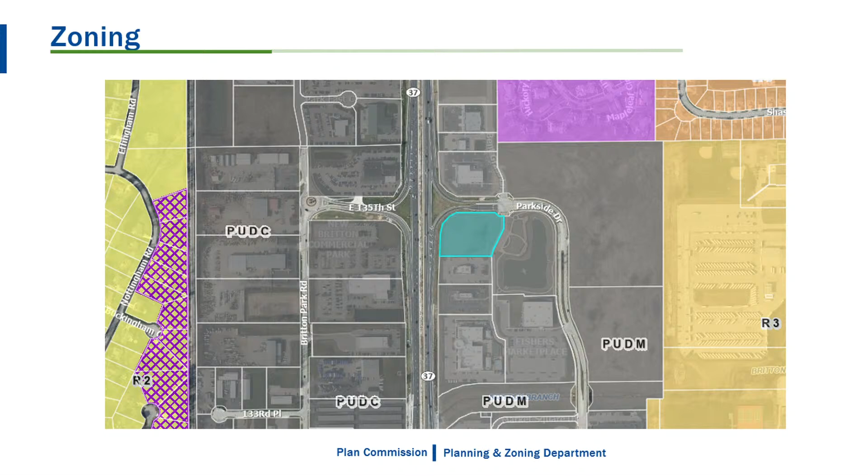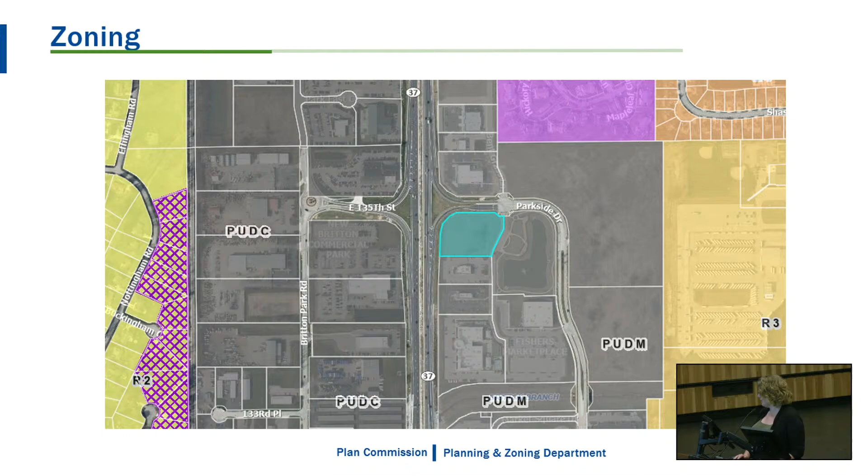The property is currently zoned PUD-M, Fishers Marketplace PUD, specifically ordinance number 070506 and amendment ordinance number 081511A. The properties surrounding this lot are zoned PUD-M to the north, south, and east, and PUD-C to the west, which is across State Road 37.

Two architectural standards were removed, one being the entryway requirements for a retail building over 10,000 square feet. This was removed because this building is less than 10,000 square feet. And the second was to remove the roof requirements requiring a combination of either parapets, cornices, eaves, or pitched roofs. Lastly, one architectural standard was added to allow the project to be constructed in a manner consistent with the renderings in the text amendment.

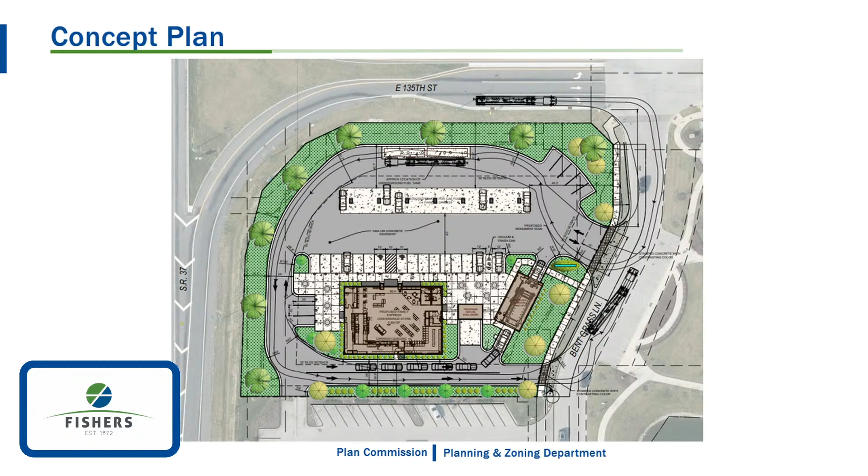The petitioner is proposing to build a gas station with 7 pumps, which is 14 filling stations, a 5,800 square foot convenience store, and a 1,300 square foot automated car wash. The concept plan also shows a plaza or patio area on the west and east side of the convenience store, and there are sidewalk connections being made from Bentgrass Lane to the store, as well as connections along Bentgrass Lane. Staff worked with the petitioner on auto circulation within the site.

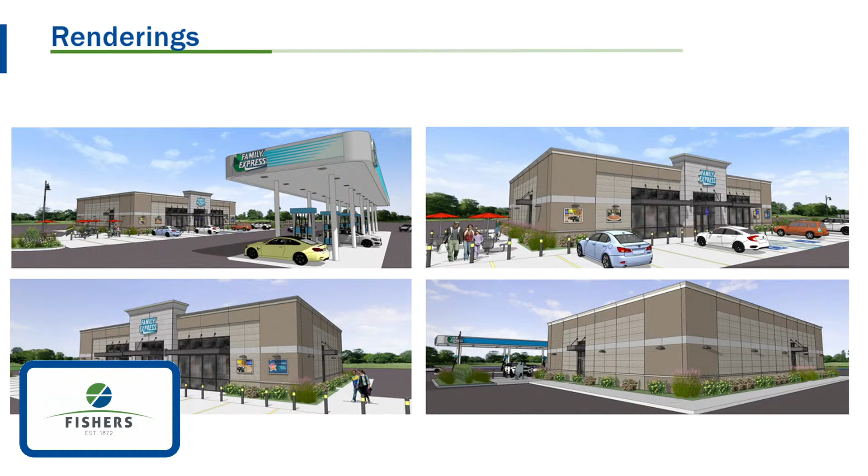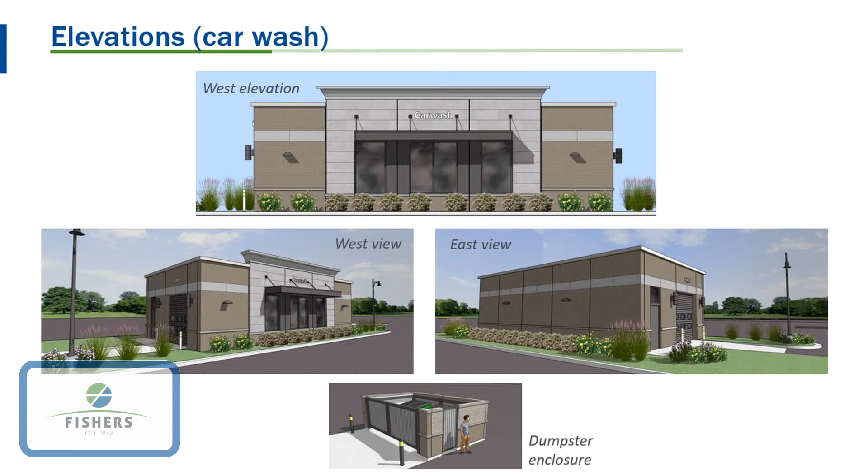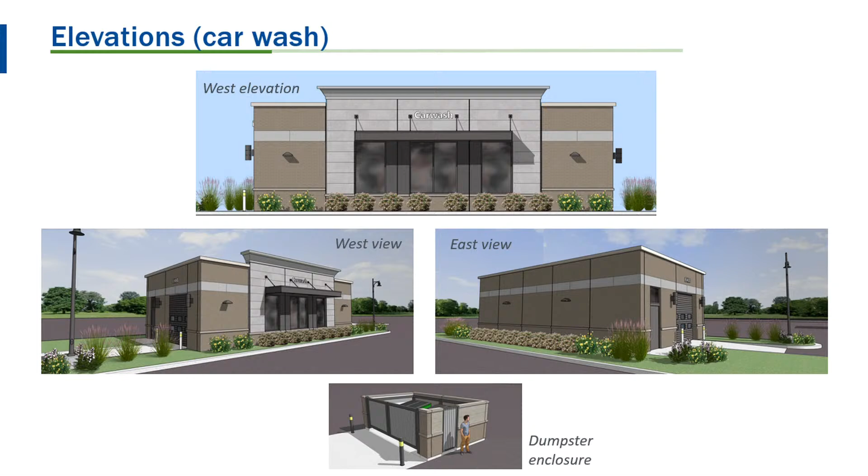The comprehensive plan calls for this area to be an employment node. This area includes the following uses: professional and business offices, maker spaces, medical offices, employment supporting commercial and ancillary uses.

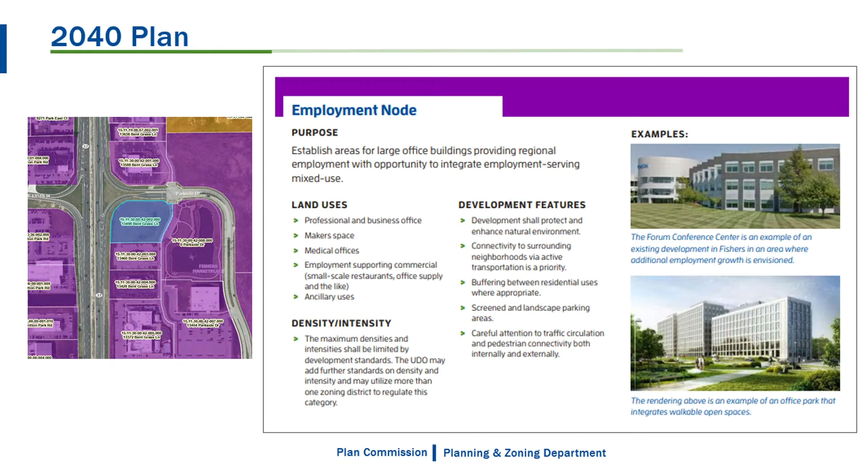When making your decision this evening, Plan Commission shall take reasonable regard to the comprehensive plan, the current conditions and character of structure and uses in each zoning district, the most desirable use for which the land in each zoning district is adapted, the conservation of property values throughout the jurisdiction, and responsible development and growth.

Staff has no recommendation for the Plan Commission this evening, and this item is anticipated to go to City Council on July 15th for final reading.

Thanks, Christy. Any questions for the staff at this point? So has council seen this already? It did have a first reading of it, back in June, May or June.

And can you share at all, any discussion they had then? I was not at that meeting, but Ross could share. I'm sorry, Ms. Logan, what was the question? Any discussion at the city council meeting?

No, there really wasn't. There was some discussion afterwards with staff on abilities of what we can do to make this better, and I think some of that is reflected in what Christy talked about, including architecture.

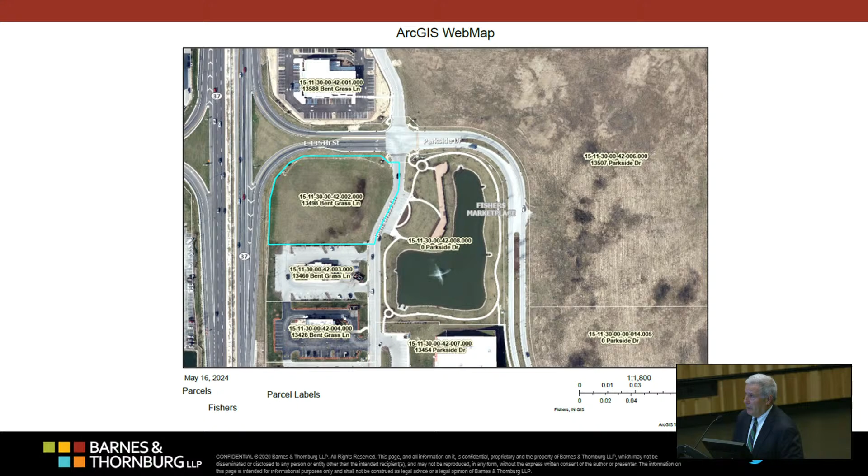The C-store will be about 5,800 square feet, which is larger than a number of C-stores that you might find. This is in order to provide the selection that Family Express offers. There are 3,500 items, hot food, indoor, outdoor seating areas. We like the fact that the site is large enough to provide some outdoor seating options.

As Christy mentioned, there are 7 gas pumps, dual-sided, with 14 positions. We've added the perimeter and base landscaping and site lighting to meet PUD standards.

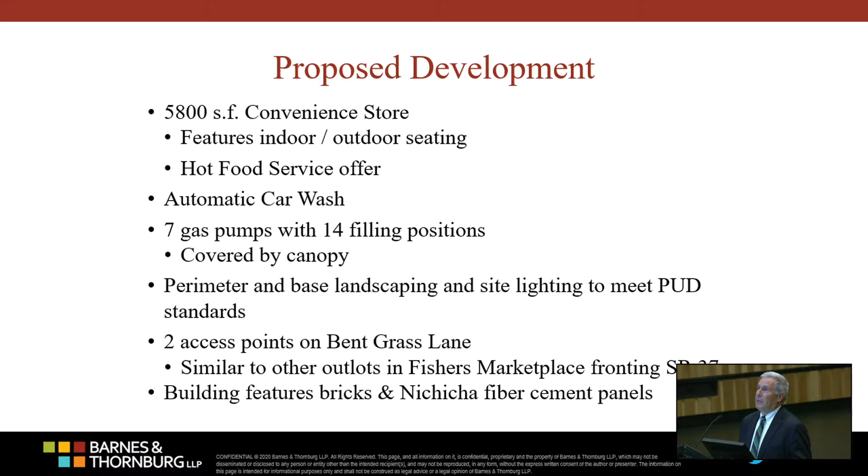When we originally presented this to council in early June, there was a pet wash. The architecture was more of the traditional trade dress for Family Express. We've eliminated the pet wash, updated the site plan, and revised the architecture by changing the color scheme to kind of match what's within Fishers Marketplace.

As you can kind of see in your mind's eye, both Zaxby's, Taco Bell, and even the B shops to the north, they're all more neutral colors. And we've totally revamped the store to reflect that.

We've also agreed to do our site lighting to match the standards. There, at one time, were some site lighting sketches. I don't know that everybody's followed, but we will work with Christie to meet all of the site lighting that's consistent. We have to do that to satisfy the Owners Association anyway.

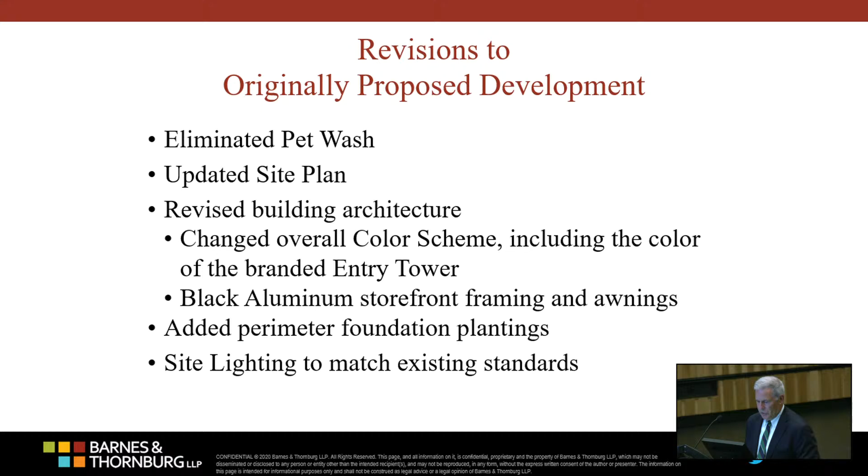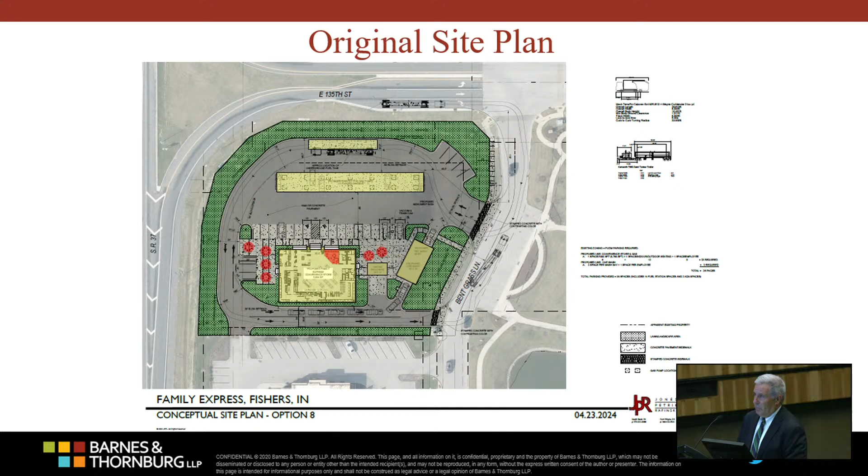This was the original site plan. You can kind of see the pet wash that was between the car wash and the building. That's since been eliminated. You can see some of the additional landscaping that's been added, the pet wash eliminated. We've got the dumpster kind of sandwiched between the car wash and the building, so it's not sticking out in any sort of front yard type of view. It's hidden as much as possible, and you can see the car wash pushed to the east to where it's really not going to be a feature from 37.

You can also probably see on this site plan the canopy is sized appropriately here. If you look at the renderings, and we admit it, and I apologize for not talking into this before, the canopy looks huge in some of the renderings. That's not the appropriate angle. The actual size is much smaller in proportion to the building.

We understand that there are users, older type of C-stores that have much smaller buildings and much larger gas canopies. So the store is about 3 times as deep as the canopy is. So don't pay attention to that. That's just kind of an exaggerated angled view.

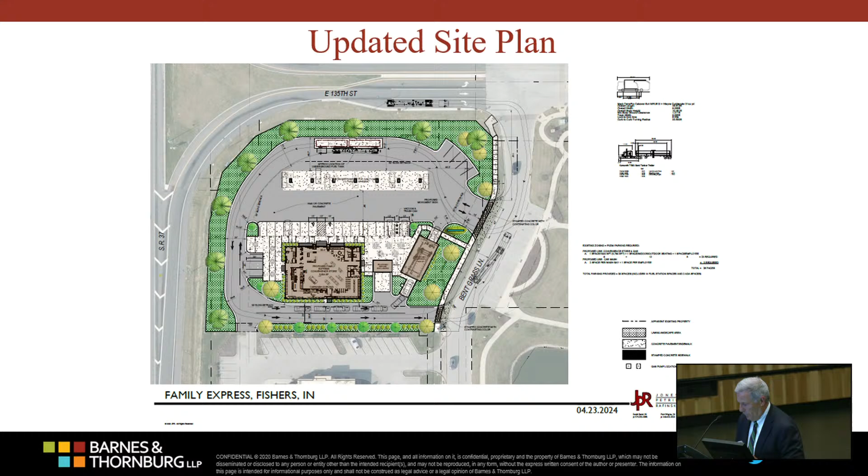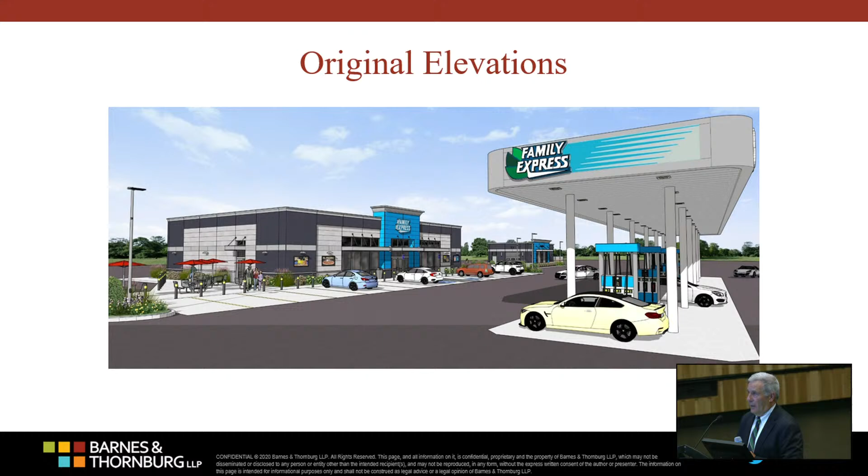The original elevations were kind of a gray, light gray, and the Family Express teal trade dress. You can kind of see that in the images that I'm sharing with you.

And it thematically went between the C-store and the car wash. In the updated images, you can see the color scheme has been softened. We've kept the Family Express trade dress color for the signage, but it's much more nuanced, and you can kind of see the black framing along with the architectural features coming off of the building at storefront and on the sides with the canopies.

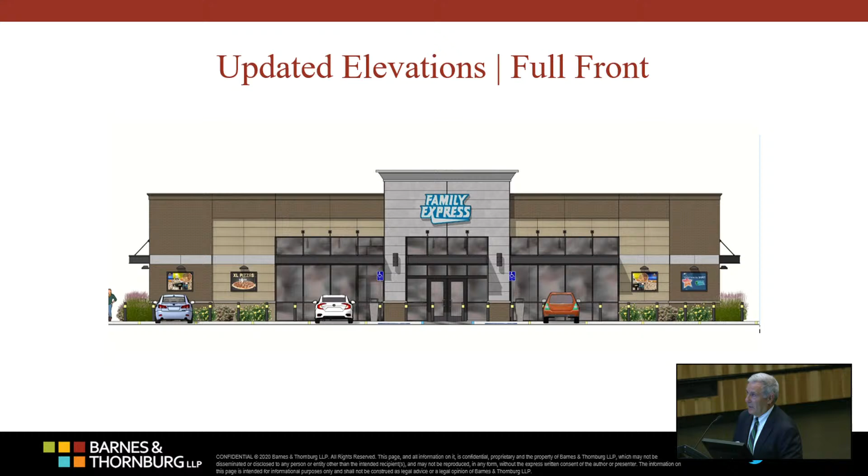Cornice treatments at the rooftop level. We actually did meet two of the three standards of the roof guidelines in the PUD. The reason we pulled it out is that there was some notion that you'd have to have some flat roof along with either hipped or gabled roof. We don't think anybody in Fishers Marketplace has necessarily followed those. They've all pretty much had flat roof with cornice, so we're very consistent in our treatment compared to the users that are adjacent and throughout the development.

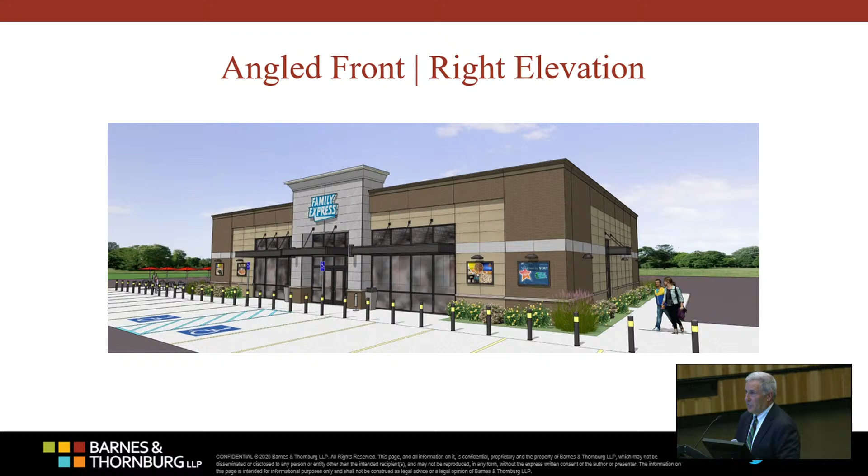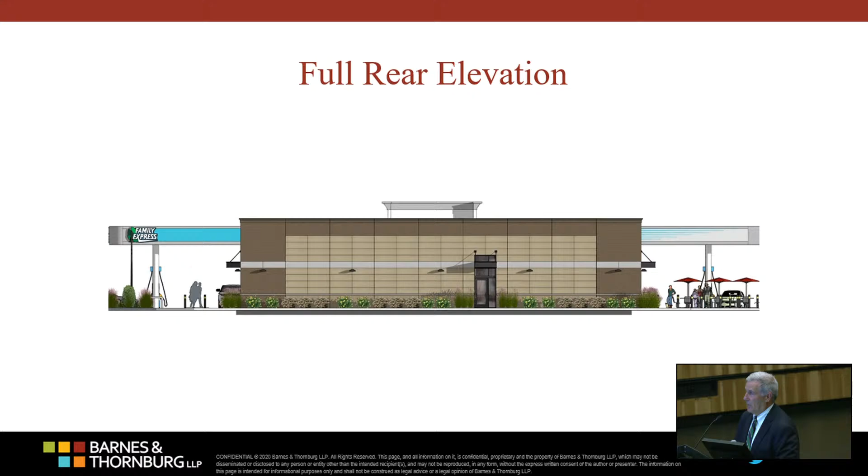Again, some of the images facing the front, you can see the foundation plantings, etc. You can see kind of the tables outside of the building area that soften up the sides that don't have full access to the building, if you will.

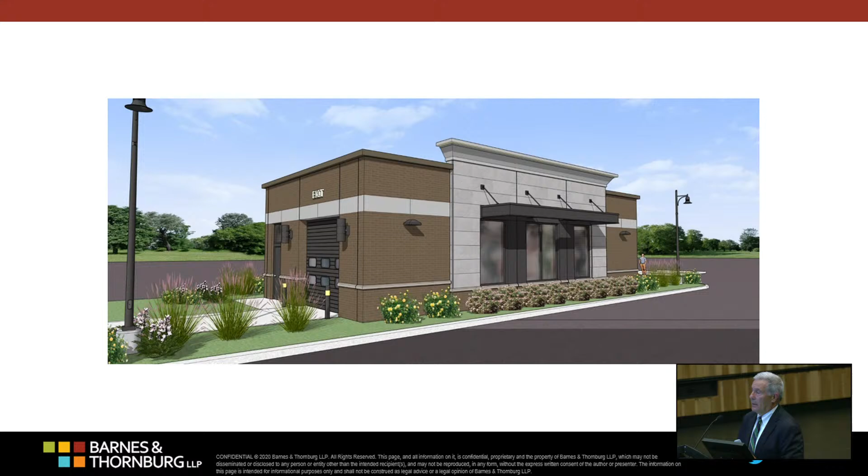That same design and color theme, and I'll have Pete come up and describe the materials and share them with you, follows through to the car wash. So it's all complementary, even to the trash dumpster.

So if this project gets approved, it will generate a significant amount of property tax. The investment will be north of $5 million. We know that that is one criteria. This lot is not generating anything other than land value right now.

Construction could start as soon as this fall. Takes 90 to 120 days to build. Could be first or second quarter next year opening.

Again, just to remind you, we are not allowing this use to apply to any other lot other than the 1.93 acres. It's referenced and cross-referenced with legal description. This has been done before with the apartments that are on the east side, just off of 131st. So this amendment has some precedent in terms of how uses have been added. And again, you can only do this use in conjunction with C-store, gas station, car wash. You can't do a standalone car wash.

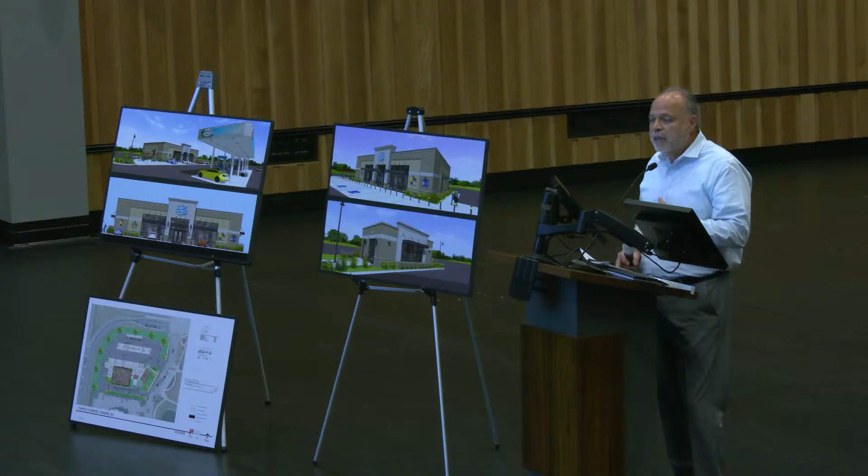With that said, we did look at the site. We acknowledge the accessibility, but we still believe that that's a site that we would like to join Fishers and cater to the community.

As far as the building, I'm not sure there's anything else regarding the convenience store site. I'd be happy to answer any questions.

As far as the architectural elements, we had a different color scheme. We acknowledge that this blends more contextually with the existing architecture. To give it character, we chose two different color bricks and three different colors of what's called a Nichiha panel, a cementitious panel. With the two different color bricks, we have a darker brick around the perimeter at the corners.

The lighter brick is on the inset of the entry along with the complementary color of the panel system. We have another accent panel that wraps the building at the same elevation as the awnings, and a third panel just around the entry element. Originally we had the Family Express teal, as that's our brand, but we understand the request was to eliminate that, so we chose a material that's more complementary to the building.

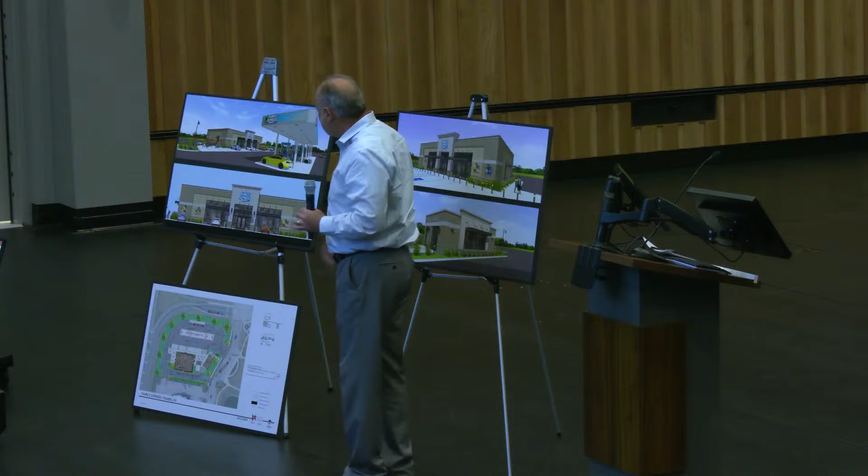We heard from the PUD meeting earlier that we're going to redo the canopy to be more consistent with the architecture of the building, looking at different colors and different shape columns. As Joe alluded to earlier, it's very deceiving at this angle. The width of this canopy is 24 feet, and this building is 64 feet, so it's just shy of one-third of the width of the building. It's very deceiving, so we'll do different renderings to help visualize and get more comfort level with it.

We're adding perimeter landscaping and foundation plantings around the building. We're going to comply with the PUD requirements about landscaping around the perimeter of the site, along with accessibility for the sidewalks.

That's all I have as far as the architecture. I'm happy to answer any questions you all may have.

Yeah, thank you, again we're happy to answer any questions. We think we've given you enough to make a favorable recommendation, considering the statutory factors in play. The comprehensive plan designates this as an employment node, which we recognize, and we think this type of use provides needed services to those working in the area.

We know, at least by reaction from the Owners Association, that this use would be consistent and complementary to the existing uses within the district. Again, there's no property tax revenue being generated, just the land value only. It's sat ready for development for almost 20 years now, and we think the time is right to allow this to be developed.